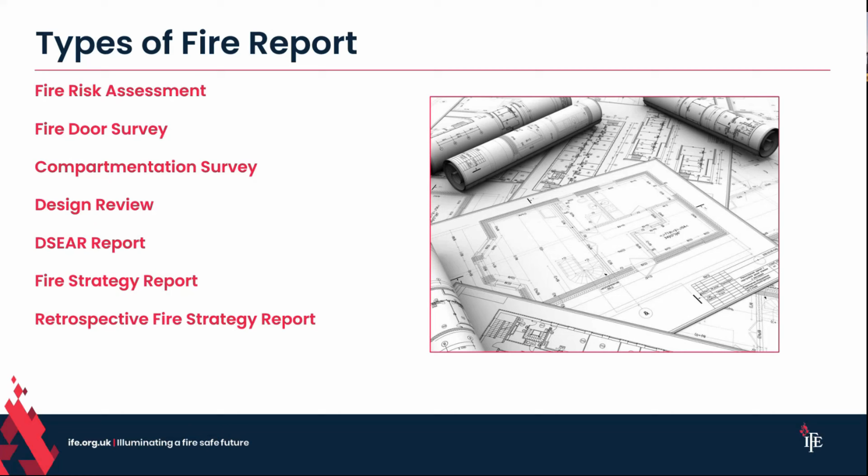So we're going to run through some types of fire report to kick off. Fire risk assessment, door surveys, compartmentation surveys, design reviews, DSEAR, and then fire strategies and retros as well to set us up for the main session. One thing I will highlight for those of us in this call here, we get a kind of ramp up in numbers for the main session, so there is some repetition.

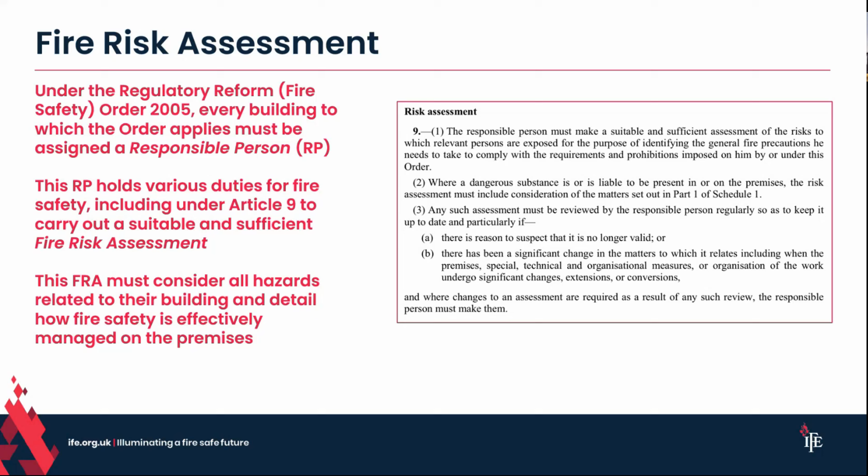I am the responsible person for our head office here. I'm at Innovation House here in Preston, which is our labs and offices and teaching classrooms and all that kind of stuff. So as the RP, I hold this duty and I have to do the risk assessment. Or if I wasn't competent, and I'm pleased to say that I am, I would seek an expert, a fire risk assessor, to come do that work for me. But the obligation still sits with me as a responsible person under the Fire Safety Order to do that assessment. The FRA must consider all the fire hazards related to the building and detail how fire safety is effectively managed on the premises.

Now, on the screen, anyone who comes to my sessions knows who I am and what I do. You know, I never normally read from the slide. I'm going to chat a bit and then I'll refer back.

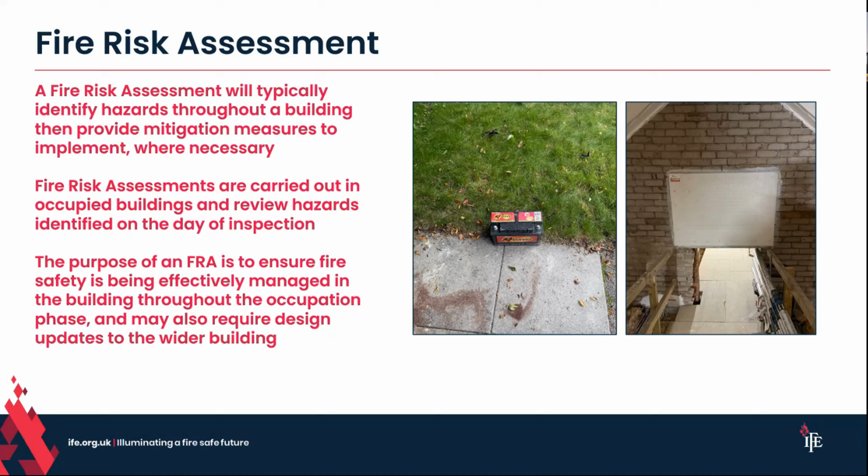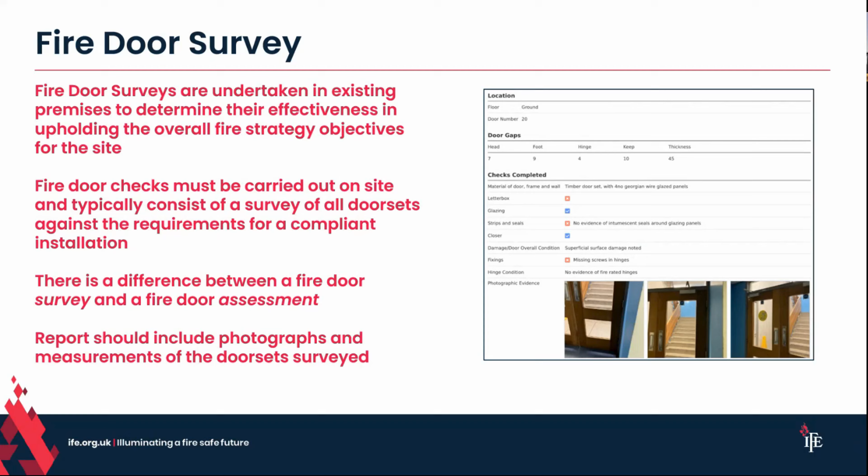So a fire door survey is an important report that we come across. It is not a fire strategy, but it is an important fire management document that we will come across working in the fire sector.

The next one, again, quick check from Joe that he's anonymized everything. Looks good, doesn't it? Marvelous.

So a compartmentation survey. I am really sorry to say, and I say this because it's the early careers, but it is a lesson for everyone. It isn't a thing. It doesn't exist. That name is incorrect. It's erroneous. And people say to me very often, again, we get it on the show, on the podcast. I get it when I'm teaching, when I'm speaking to people. Oh, they definitely do, because everyone calls it that. But you know, if everyone calls it something, it doesn't make it right.

Compartmentation in a building is a very specific type of passive fire protection. And it's very unlikely that we're engaged just to review that compartmentation. It's far more likely that we're engaged to look at compartmentation and also all the fire resisting construction that's in the building. So if we are just engaged to review compartmentation, all we're looking at is party walls, separation corridors to flats, separation between units, but we're not there to look at storerooms and cupboards and all those, because they're not compartmentation. That's a very strict definition.

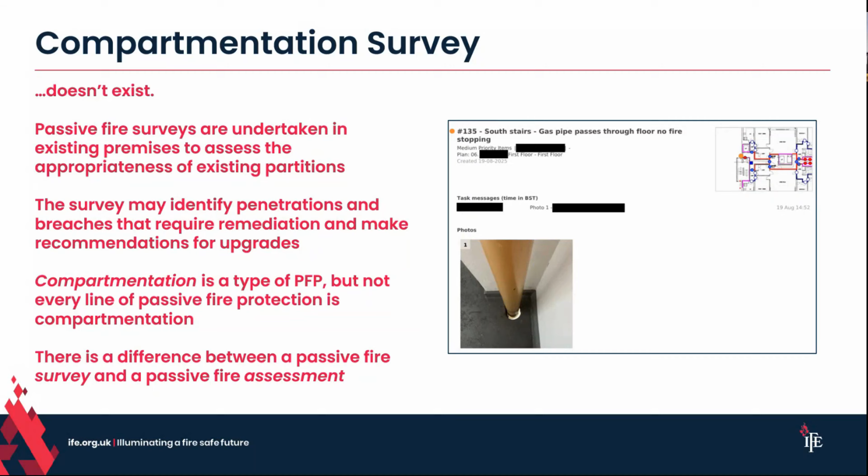I've seen all too often, and I'm ashamed to say, can confidently say I've been that surveyor in the past where I turn up and I go, what am I here to see? And they go, just look at the doors. And I go, what doors? What's critical? What's important? I need to rely on my strategy to understand what I'm looking for, which is what we've got a snapshot of there.

Cool, doing good for time. We've got just a couple more of these and we land on the fire strategies.

What a design review really is doing is helping inform the design team early in the process of critical things that we want to see changed or that we would recommend are changed, so that we can move that design along and we can develop a fire strategy comfortably further in the process.

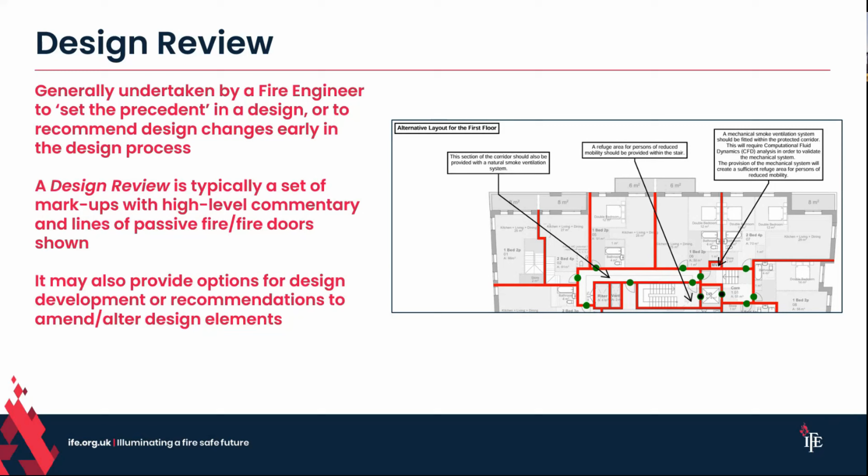If I'm working with architects, I do like to give options. I don't like to just say this is all you can do. If possible, I'll always give 2 or 3 and say these achieve the standards. And again, I'm kind of narrating my day. But I've been on the call to a contractor just this afternoon before I came on air here, saying there are 2 designs we would support. Let's present both to building control, see which one they decide on. So design reviews are really important, and we come across them a lot in fire safety. They are an intrinsic part to a fire strategy, but they are themselves not generally considered a strategy.

Another one very quickly before we come on to fire strategies and the main part of the session: DSEAR risk assessment.

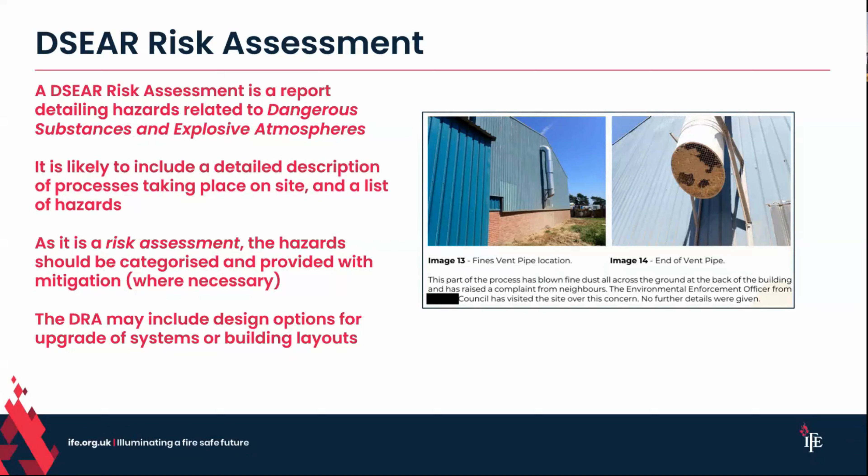And the point that I come to here is that very often off the back of any of these pieces of work, we find ourselves having to design a solution. And we land here at fire strategy reports. Now, these couple of slides we repeat in the main session. I wanted to get us to here before we start the main session in about four minutes' time. So I'll whiz through these, but we do refer back. So if we have anything that comes off of our building risk assessments or management systems, or we're designing a brand new building, we will require a fire strategy report of some kind. And there are a couple of different types of fire strategy reports we will come across.

The first one, and it's the first one that I think of, and I would wager, if I were a betting man, which turns out I am, so I will wager, that our friends in the fire service would likely consider this, and approval authorities, this is what we see as a fire strategy. If I said draw a fire strategy, you'd draw one of these, because it's a design strategy.

So it is during the course of the design of a building, working with our architect friends and working with the design team, we are developing solutions along the way to implement to that final building before it becomes constructed, becomes reality, and we design into the scheme. Generally, they're developed slowly throughout the design stage. We are making decisions along the way with the architect about how the building's going to look, what it's going to be made out of, and how it's going to operate. We follow what we call the RIBA stages, which we cover in the main session.

The intended audience for that changes throughout that design stage, and this is the main session content, but I wanted to at least tease it in this so we've got it in our minds. We're not always writing a fire strategy for the same person or organization or body. Early in the design, I'm writing that for the architect and the design team. This is what I think we should do collectively as a team. Like, thank you for inviting me to be part of your team. This is what I recommend we all do.

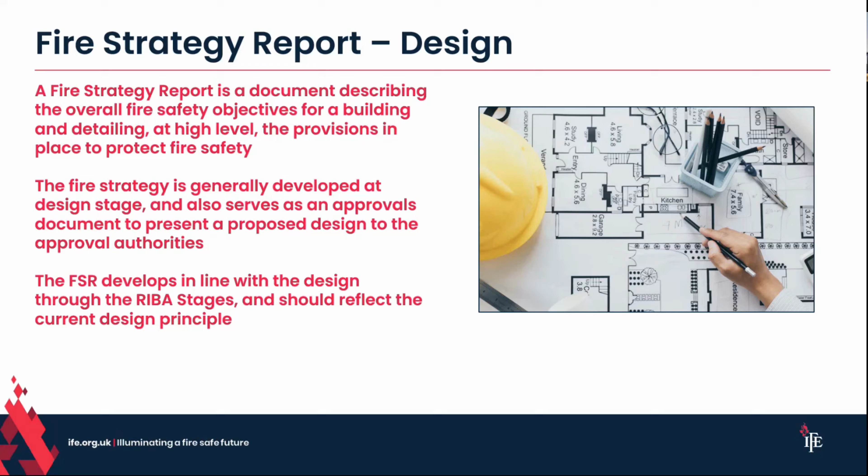I touched on this in the early careers, but not in great detail, and it is the first big takeaway really from the main session. When I train people, whether it's trainees who are working with us in the firm, whether it's students, whoever it is that's learning from me, and I always feel privileged to teach this, first big lesson in strategies: always consider who's going to read your report. So who are you writing it for?

It's so important to understand that, because the audience of your fire strategy, or the reader, or the end user, whatever we want to call it, changes depending on at what stage you're writing that strategy. If we are in the early stages of design, we are probably working with a design team, and we are saying to the design team, here's what I recommend we do as a team. And the intended audience for that is the design team and the architect and the client. And we're probably presenting options.

Early design stage, I'm going to use my building around me here because it's a good case study. That corridor, maybe, I don't know if my camera's on, and I don't know which camera I'm on. Bit of a shambles. There's a wall behind me if you can't see it, I promise you.

Does that need to be fire rated, yes or no? There is no right answer to that. In some strategies it does, in some strategies it doesn't. I've chosen not to fire rate that wall because above the ceiling in my office here is a shambles, and I don't want to have to fire stop the whole thing. So I've developed for my own building a different solution that doesn't rely on that wall being fire rated. If that were a design team and it wasn't my own building, I'd be saying to that design team, here's some options. They're my audience.

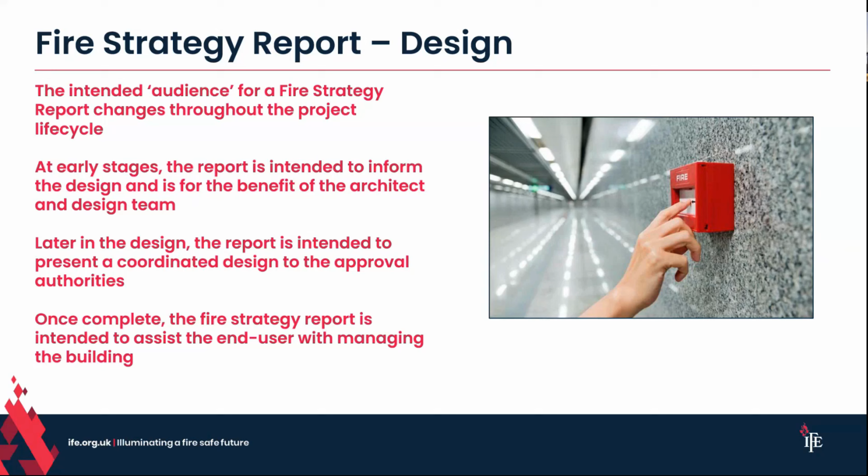It's one of the questions that I ask in kickstart meetings we have internally. Who's appointed us? Because if we've been appointed by an architect, we speak very differently in our reports to if we've been appointed by a fire safety manager, or by a responsible person who doesn't understand what their responsibilities are.

One of the very first things that we do in that engagement, when we're thinking about fire strategies, is we think about what we're trying to achieve. What are our objectives? There are many objectives that we might consider when writing strategies and working in fire safety generally. The first of those is life safety. We're seeking to protect the people that are in the buildings, and that's intrinsic, and that's one that never goes away. It underpins our regulations and all the work that we do. All of our professional ethics and standards are based on protecting life in buildings. If anyone contests that, leave the call immediately and I'll speak to you after. That's irrefutable. But we also have other things that we might put into our fire strategies.

For example, we might want to enhance certain things to protect the property that we're working on. I am fortunate enough to work on loads of heritage properties. In addition to getting everyone out of the building, protecting firefighters going in and protecting life, I'm also interested in the property protection, the asset protection. If I work on a museum or a gallery, one of my objectives is also to make sure that everything in that building survives a fire and we knock it down as early as possible. The couple of examples on the right-hand side are great examples. The top right there is a line-side fire on a railway.

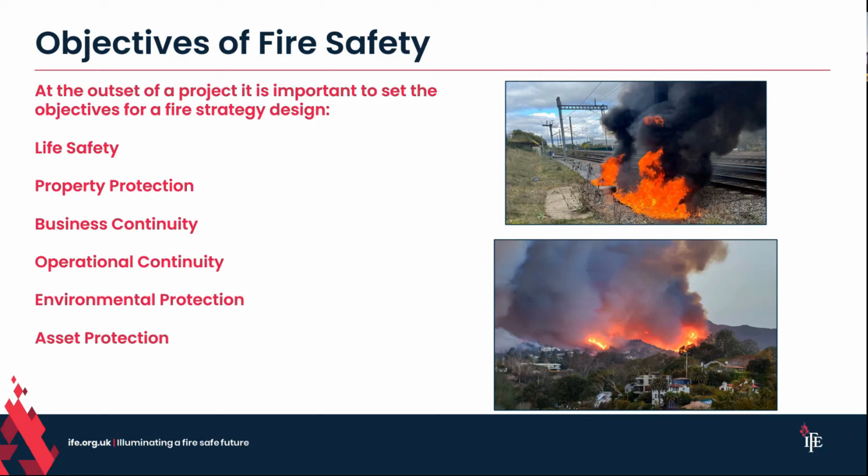Now, in addition to thinking about what we might like to do, there are things that we must do. We have requirements, and our fire strategy requirements, I'm going to talk about England because I'm based in England, but broadly this is across the UK, are in the form of regulations. For us here, we consider the building regulations to be our absolute minimum. Strategies are developed in line with the requirements of the building regulations.

The Building Regulations 2010, as amended, were made under the Building Act 1984, as amended by the Building Safety Act and others. But broadly, these set out requirements we must meet in our fire strategy. If our designs do not meet the requirements set in the legislation, we have committed a criminal offence. In truth, we cannot get away from those. It's our bare minimum.

And a second takeaway from this talk is that the building regulations are only based around the requirement for life safety. So if you meet the minimum standards of the building regs, you have met the objective of life safety, but there is nothing intrinsic in them for property protection, environmental protection, operational business continuity, protecting the assets. So very often we work to these and we go above. Certainly me as an engineer, if I'm working with clients and I know what they're interested in, I'm going to go above and beyond wherever I can.

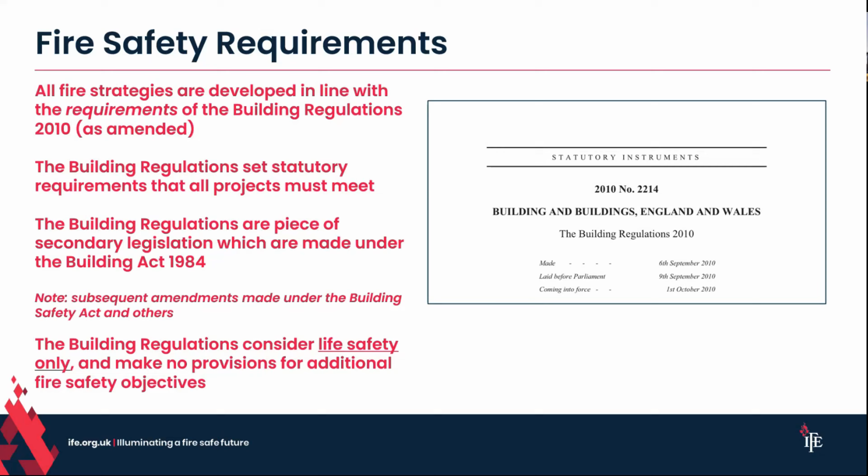So our first requirement is the building regulations. For anyone working in fire who hasn't read all the building regs, I encourage you to do so. Go read Part A. We're interested in Part B, but read Part M, Part P, Part S, Part T. There's just been a new T, but it is important sometimes. Part T is toilets, by the way.

So the building regulations are uniform across all disciplines. They work in the same way, which is what we call a functional system. They set functional requirements. They tell us what to achieve, but not how to do it. So when I say go and read all the building regulations, I'm not suggesting take a week off work and read them. I'm saying on the bus home, open them up on your phone and skim through them. It takes you 20 minutes.

Essentially what the building regs do is they set a bunch of functional requirements that we must do certain things to protect life safety in buildings. The example on screen there is intentionally not fire, it's structure. What it says in Part A is that the building should be constructed so that the combined dead, imposed and wind loads are sustained and transmitted to the ground safely, etc. It doesn't tell you how to do that. It just says that's what you need to do.

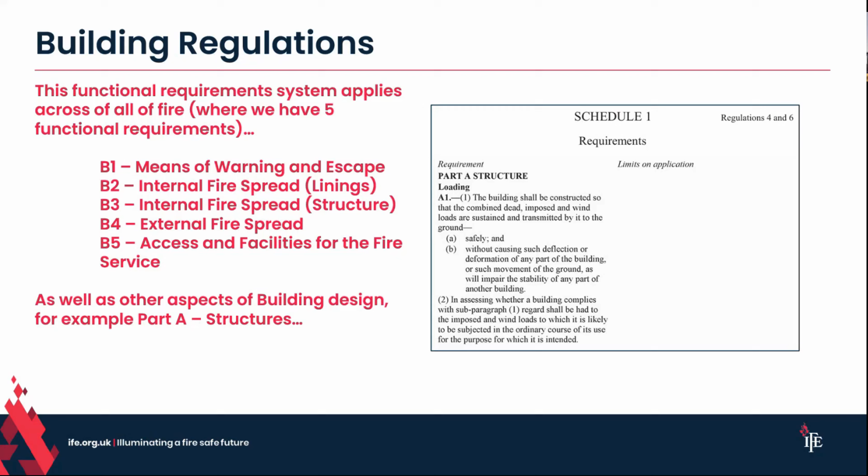And for us in fire, we've got Part B. That's broken down into 5 sections, Part B1 to B5, and it gives us all the different requirements that we need to do. What they look like is this. They are a set of functional requirements. External fire spread is Part B4. It tells us that the external wall shall adequately resist the spread of fire over the walls and from one building to another, and the roof should do the same.

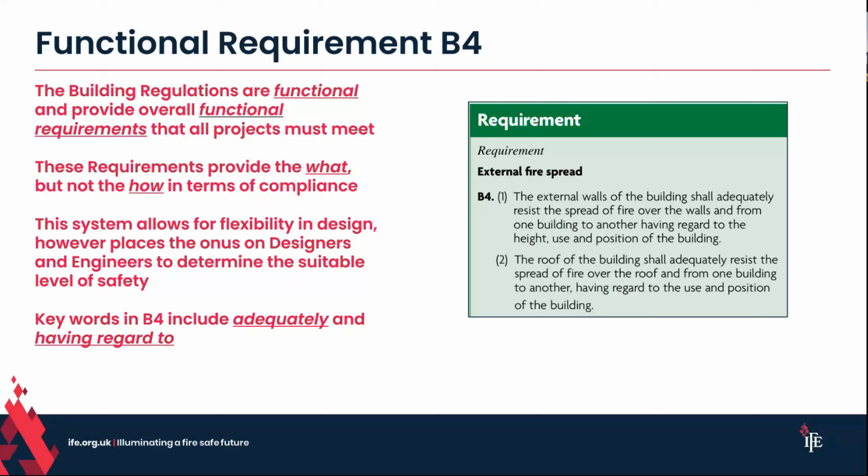It doesn't tell us how we should achieve that. It just tells us what we have to do. We get the what, but not the how. The system gives us flexibility as designers, but it also puts the onus on us. So in our fire strategy development, the first decision after we've set the objectives and who the audience is, we must also then decide what our definition is of adequate in terms of external fire spread and what we deem to be appropriate. We are essentially in our fire strategy setting out the definition of those terms and designing our building according to our own definition.

Now, I come on to how we write the strategy and then the methodology, and that's where we go in the next part of the talk. I've talked a little about the RIBA stages. RIBA are the Royal Institute of British Architects.

I'm a member of RIBA, an affiliate or associate, whatever it is. If anyone's in fire, and your company covers some professional membership, stick this one on, because I find it to be one of my most beneficial professional memberships, actually, because you get the RIBA journal and you get to understand architects and their processes, which is unreal. They also have an amazing CPD section on their website. So yeah, good little tip.

We look at the RIBA plan of work, and the RIBA stages an awful lot in fire. And that's because if we are designing a fire strategy, we are generally working in a design team and we're working through the stages alongside that team led by the architect. The stages start at strategic definition, stage 0. They go all the way up to stage 7, which is in use. Along the way, we get all of our design stages up to stage 4, into construction and manufacturing at stage 5. 6 is handover of the building and 7 is in use.

Fire strategy reports, as I mentioned, are not a piece of paper we write, give to building control and then invoice the client. It is a process that we follow. I find generally a RIBA stage 2 fire strategy report is one of our first engagements. For anyone in early careers, we talked about a design review. Often a design review is what we output at RIBA stage 2. What we're doing is giving concept design advice. So high level advice: this is what we're aiming to achieve and this is what we recommend putting into the building. And as we progress through the stages, we get more and more detailed.

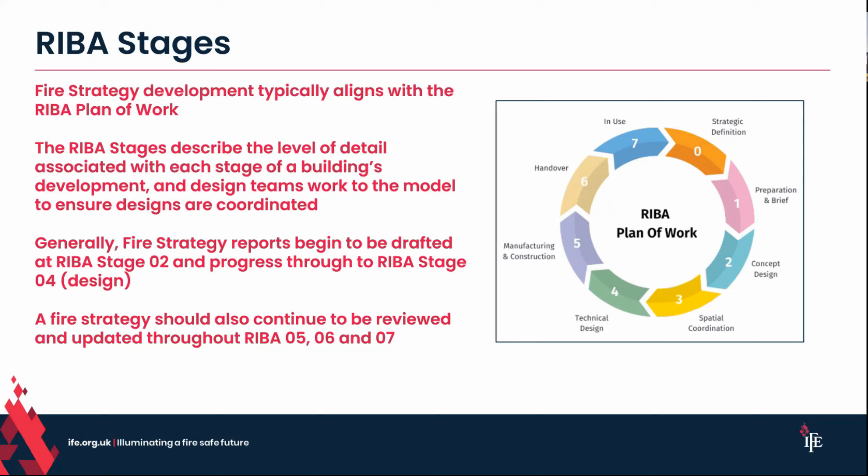Fire, I say all the time in these, is one of those unique disciplines, or sectors, I suppose, that are involved at every RIBA stage. We don't step down, we don't demount at any of those. We are involved throughout the whole building life cycle, and we're quite unique in that.

Now, to explain this, I thought I'd put an example in, and it is a made-up example, it's fictional. But to be fair, it could be every project because we do it so regularly. I thought what I would do is, if I were writing a fire strategy and I was fortunate enough to be engaged at the very early stage, at RIBA stage 2, that's the early design, and I'm going to be working on that scheme right the way up to handover at RIBA 6. That might be a 2-year job. What does my strategy do during that time? How does it evolve and change? Because it does. It's the same core strategy, but it will change.

So I've got a couple of examples here. There's a big white space because I fill in RIBA 3 and we go through this together. But I thought I'd pick a fire alarm, what I might say at each RIBA stage for a fire alarm system.

So RIBA stage 2 is quite high level, concept design stage, and I would be engaged and I would be designing a fire strategy, and I would be making a decision about who's in the building and how I'm going to protect them very early on. I'm not considering materials yet. We haven't got a plan, a detailed design plan. We might have some floor plans that are in abeyance, and we're kind of working through those still.

But I'm going to make key strategic decisions at this stage, and I might decide I'm going to put a fire alarm system in. So the text of my report would read something along the lines of, the building should be provided with an automatic fire detection alarm system to provide early warning to occupants of fire. And should is an important word there. It's very intentional that I've put that word there.

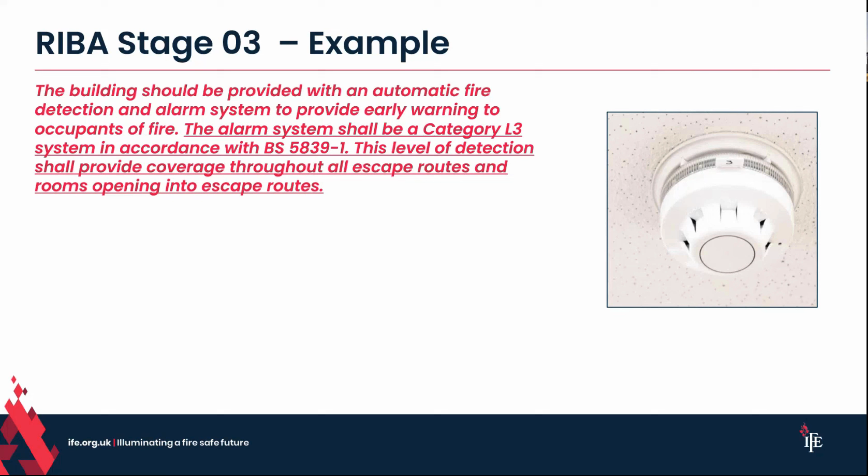So that the alarm system shall be a category L3 in accordance with BS 5839 Part 1. This level of detection shall provide coverage throughout all escape routes and rooms opening into escape routes. That is a design decision again. That comes under me. I have to make that decision and be able to back it up if I'm questioned. But I'm deciding now. We've got a little more information. I've probably got a relatively fixed layout at RIBA 3. So I know I've got escape routes, rooms opening into, so that's the category I'm going to choose.

Moving on to RIBA 4, which is my final design stage, I give a lot more detail. This is the last report, and again, I'm thinking about the audience. So this isn't just going to my design team and the architects sat around me, it's also going to the approval authorities. It's going to go to building control, building safety regulator maybe, the fire service, everyone on the client to sign off. So I need to give really clear, really definitive decisions at this point. I can't have options in a RIBA 4 report, because if I send that to building control or fire service, you are quite right to send it back and say, make a decision, chaps. Which one are you doing?

So my terminology changes at RIBA 4. Instead of saying the building should be provided with an automatic fire detection, I change it and say shall. It will. We've made a decision. This is what we're going to do. I still have the information about the category of system, but I have more detailed design as well, because off the back of this, we need to go find a contractor, we need to procure, we need to go out and build the thing. So this time at RIBA 4, I've added.

It's been identified that smoke detectors may cause unwanted alarm activation, and therefore heat detectors shall be provided in kitchens and plant rooms. Fairly straightforward design decision. I've plucked that out of 5839 part 1. I'd do that on every scheme, but it's final decisions that I've made, and I've documented in my strategy.

Detectors should be interfaced with the AOV. Detectors shall be, important word, interfaced with the AOV at the head of the stair. That's the vent at the head of the stair to open. And the smoke control system in the firefighting shaft. A good stage 4 design there. That's all the information that we need. I would read that as an approver, if I were an approver, and go, yeah, okay, that makes sense. We've got a decision. We know what we're going to do. Strategy's pretty solid. Now, that's the last design stage.

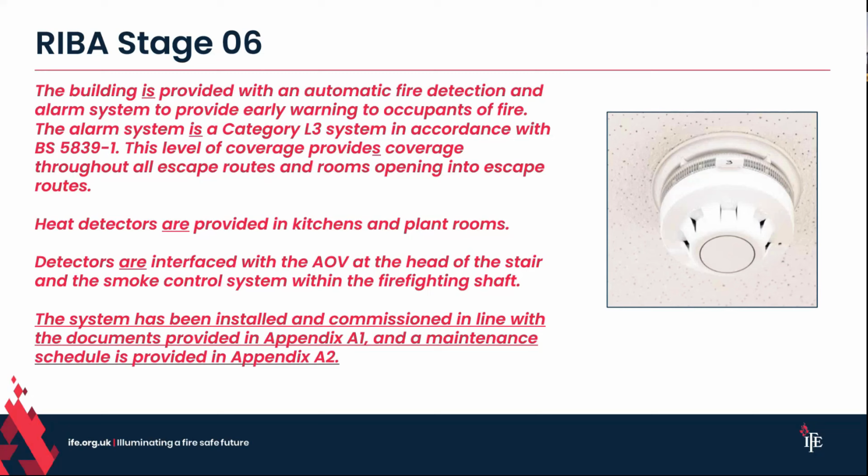Now obviously we're talking here about new builds, and we differentiated at the start that we've got different types, and in the early careers we started on this and we dropped it and said we'd come back. And I told a story in the previous one of my amazing colleague Tia, who's on the call, I think, and we chatted once about what we might expect in the fire service of a fire strategy, and we'd expect it to be a design.

And approvers sometimes are not aware of this, but actually a huge chunk of work that we do in the fire sector is about existing buildings. And there are lots of reasons that an existing building might not have a fire strategy. It might be that we, we being the royal we, the world has lost it. There wasn't a record of it. That happens more often than you'd expect.

It might be that our building is the White Tower in London, and it was built nearly 1,000 years ago, and William the Conqueror was too busy conquering, wasn't knocking up fire strategies, presenting them to building control. It might be that there just were no discernible standards at the time, or the work's been done without suitable approvals. All of these reasons mean that we might not have a fire strategy, and we do these retrospectively.

And this is sort of anecdotal, and if there's any fire engineers on and you message me after, I'd really like to hear whether you anecdotally feel the same. For me, it's about a 50-50 split in the sector at the minute. 50% of inquiries are new build, 50% are retrospective. I think with the Building Safety Act, there's a real focus on existing buildings and submitting safety cases and all that good stuff that we're doing. So about half the work that's banded around, certainly in my portfolio, is actually existing buildings.

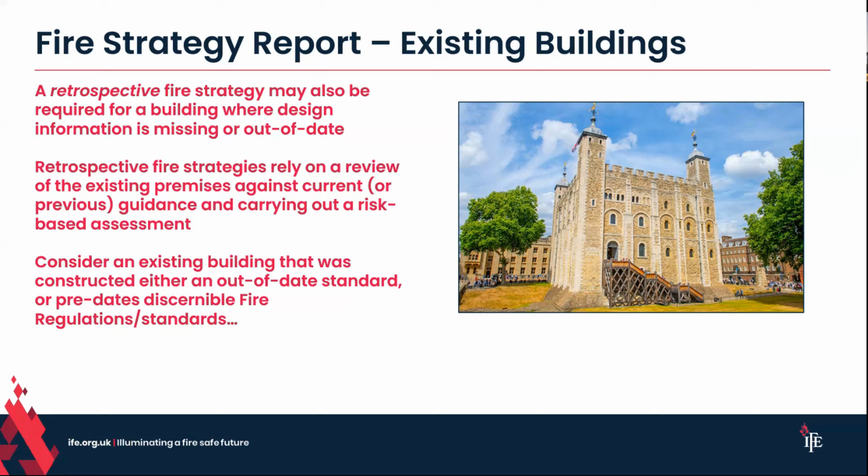And this, when we got this question from a member saying, could you please cover this? This was the crux of the question. What do we do with existing buildings? And I'm really happy to answer it, because this is a big chunk of my own work.

And we find ourselves very often writing what we call retrospective strategies, or at least passive strategies. Now, where a building is existing, but we have no design information, it's common to produce what is asked for as a retrospective fire strategy or a retrospective fire strategy review. There are broadly two types of retro report that we might carry out. There is what we call a compliance review, which is a review of the building to the standards at the time of construction. And there is a risk-based review, which is what we review to current standards. And they are very, very different reports.

And if you are an engineer, or you become one, or you seek to become one, and you start getting asked for these, the first question to nail with the client, got to be in your fee proposal, probably the first call you have with them, is which one do you want? Is it a compliance review you need, or is it a risk-based strategy for your current condition?

I note on there some of the reasons we might need to do a retro. It might be the information's wrong, the building's changed, and we're not confident in what the design information says, or it's heritage, they just weren't writing strategies at the time, or we've lost it. It happens all the time. So those two types of retro report are super important, and I want them to be some of the takeaways for the member who wrote to us and said, could you please cover this in one of your webinars?

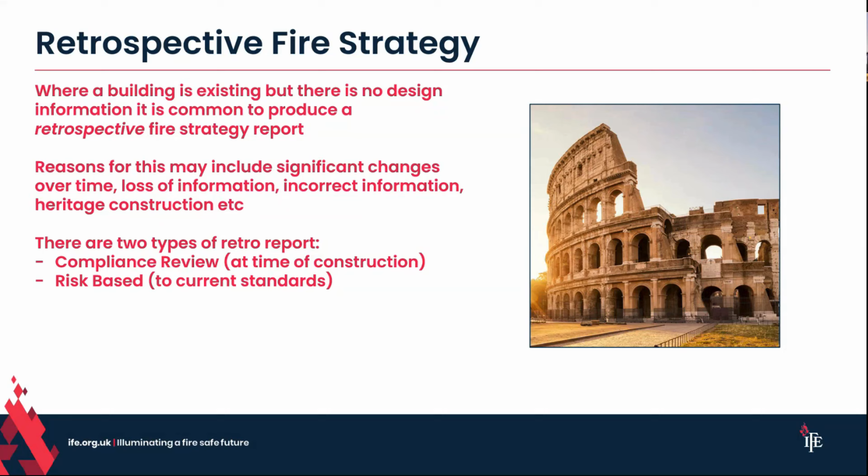Now, I've got a couple of examples. Some of my team will recognize their own report. I do hope I've anonymized it, especially because we're recording. I definitely hope I've anonymized it.

So the first one of these is a risk-based fire strategy. It's a retrospective strategy based on current guidance. And this is, to be honest, how retrospective strategies should be done. If I'm engaged to write a retrospective strategy for an existing building, I am going to review that to current standards that I would design to today. So let's start with the one on the right-hand side, the image. I'll talk through that, and then we'll come into some of the theory, and I've got another example on the next slide.

I will suggest it is impossible to write a retrospective strategy without going to site. Then it is not a suggestion, it's a fact. It really is not possible, because your scope, what we're aiming to achieve, is to review what's on site. So you can't do it by driving past or do it on Google Maps. And what my amazing team have done here is they've been on site.

So it was observed during [our company's name] site familiarization visit back in January that the fire alarm detection system is present in the common stair, but does not extend into the common corridor and common lobby, as shown below in figure 10. This is a real project; I've just plucked it off the system. I don't know if it's a good or bad example, but it is an example.

So the area shaded in blue shows areas of [project name], which I've anonymized, which is provided with detection coverage, and the area shaded in red shows areas not. It is understood that the alarm coverage at [project name] was implemented based on advice from a given fire and rescue service. So what we've said in this case is that we've been to site and observed we've got detectors in the stair but not in the corridors, and we have documented in our retrospective strategy what is on site today as we stand there.

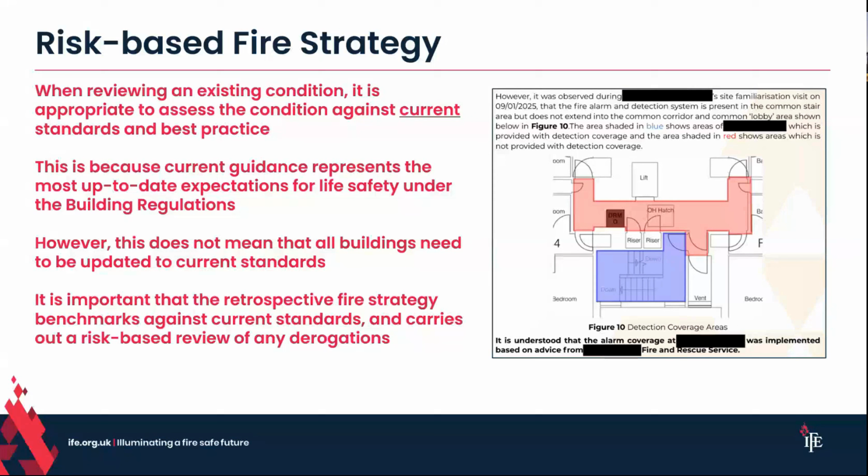Every time we get a new ADB, we're not going to every building in Britain and redoing it; we'd be doing it every 5 minutes. What we're doing though is using the current best practice and best knowledge to benchmark against and assess our building to best current knowledge and standards. So it's important, final bullet point, that a retrospective strategy benchmarks against current standards and carries out a risk-based review of any derogations.

Now, what that looks like in a strategy is on the next slide from the same report; we've got some of those derogations. And this is, again, the way I present it and the way that our team presents it. It's not right or wrong. Well, it is hopefully not wrong, but it's not the only way. But this is, we believe, a useful way. We include in every one of our retrospective reports a derogation schedule, and we highlight everything that doesn't meet current standards if that building were to be built today.

You'll note that in this example, we disagreed with the fire service. Again, I've anonymized it. I hope nobody recognizes it. If you do, that's not my intention.

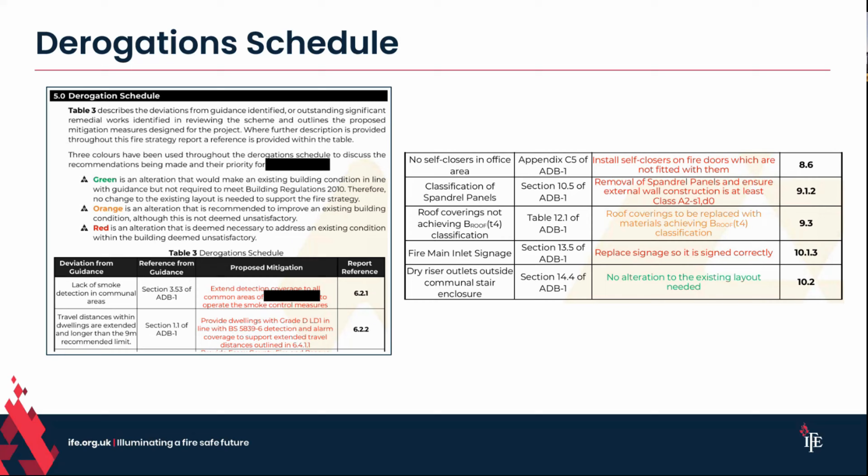Right, excellent, cool, we'll soldier on. The other type we talked about was a compliance review. I said there are two types of retro. The first one is what we just discussed is risk-based, and the second type is a compliance review. Now, this again, I'd like to be a takeaway for folks who are learning or are practicing maybe, but find it difficult to differentiate. It's an important point. A compliance review is reviewing a building to the standards at the time of construction.

Now, that can be valuable in some cases, and we do a good chunk of that. A couple of my guys who are on the call, Alicia Limara, we've just done a big piece of work doing this, where we did a compliance review at time of construction. The reason for that was because there was some litigation against a contractor. Had they made mistakes? Should it have been built in that way in the year in which it was constructed?

Fair piece of work, it needed doing, but we caveated really heavily by saying, we're not saying you just need to bring it back to the standards of 1970, whatever it was. In addition, we need to do a retro and decide what you're going to do to make the building safe today. But a compliance review to standards at the time is not something that we consider for life safety in our fire strategy.

So if our objective is just to work out liability, to apportion blame, to work out what mistakes were made at time of construction, and there is a world where that exists, there is an expert witness industry within our sector, and I live in that industry, don't get me wrong, it's an important part of what some of us do. But it's not the correct approach if we're looking at building safety. It's not appropriate, in my view, to say, well, the building was built to this standard. It was okay at the time. Standards have changed, but we'll build it back to what we said in the 1970s.

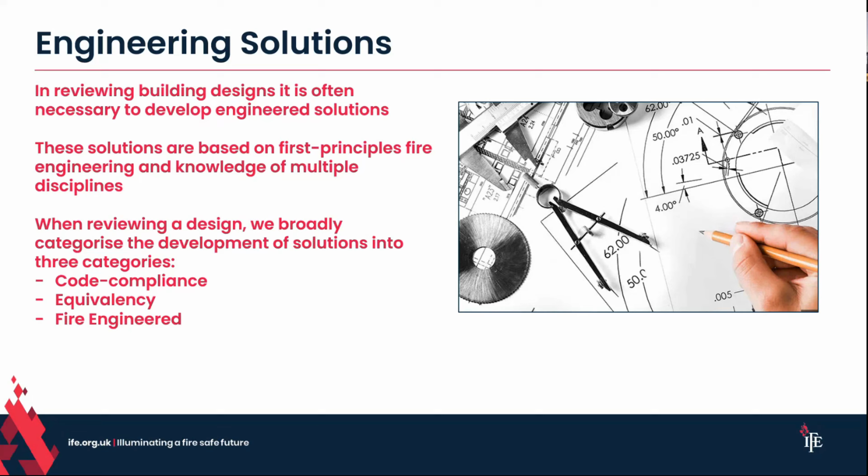And there are broadly 3 methods that I use for this to feed into my report for each of those subsections. The first thing I might choose to do is to comply with an established guidance, so a code compliant route. For example, Approved Document B gives me a schematic there for how to design a single stair block of flats based on the principles of compartmentation between flats, fire doors, limiting travel distance, and ventilating the lobby. If my building complies with that, fantastic. That's my design approach. I'm going to follow that and write my strategy based off of the guidance in ADB.

If my building maybe doesn't, and I want to change it up, and my travel distance is 8.5 meters, I might say in my design, can we reduce the travel distance, move the stair? If you've got cross corridor doors, can we remove them maybe, and can we have it so we have a lobby approach and we ventilate the whole lobby? That might be a good piece of design. I will either amend the design during my design review to meet guidance, or if I already meet the guidance, I know I've got an established principle. That's my first option, really.

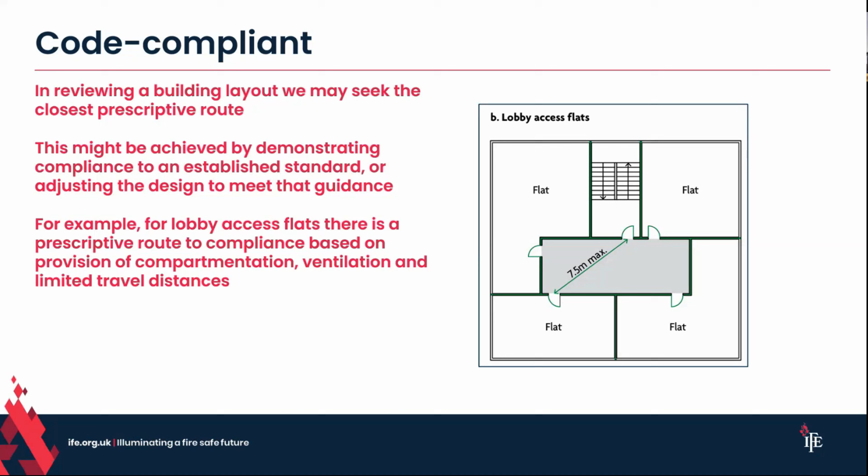But because guidance isn't mandatory, there are other things that I can do. And if I'm an engineer, I may seek to deviate away from that, not because I want to bend the rules, but because the rules are there for very simple premises. And most buildings I work on as an engineer, the only reason I'm engaged is because I'm working on a complex building. So I look at my engineered solutions. The first method I'd use for this is what we call equivalency. And equivalency in engineering is if I take an established principle and I can quantify the safety, and if I can demonstrate that my design doesn't meet that guidance, but it is equivalent to or better than, I've demonstrated equivalency. And the great example I use for this all the time is travel distance.

So let me pick an example. Purpose group 3, an office. You need to have 18-meter travel distance limitation in one direction and 45 to reach a place of safety. That's not a regulation. That's not illegal to deviate from that. I'm sat in a building that doesn't meet that standard right now. It's my own head office. But what I would do is I'd say, okay, well, because I don't meet that standard, I need to demonstrate equivalency or do an engineered solution. So what shall I do instead?

And the way that I approach that, and travel distance is one of these that I do very simply as a simple solution, not involving modeling and all that kind of crazy expensive stuff, is I'd say, okay, so what Approved Document B is telling me there is that my office needs to have 45-meter travel distance maximum to get to a place of safety. And I look through the document and I think, what else does it say for an office that I need to have? And if I follow that chain through, you say, okay, the office then, you limit travel distance to 45 meters, but I only need 2 stairs and I don't need a fire alarm because all I need is a manual system.

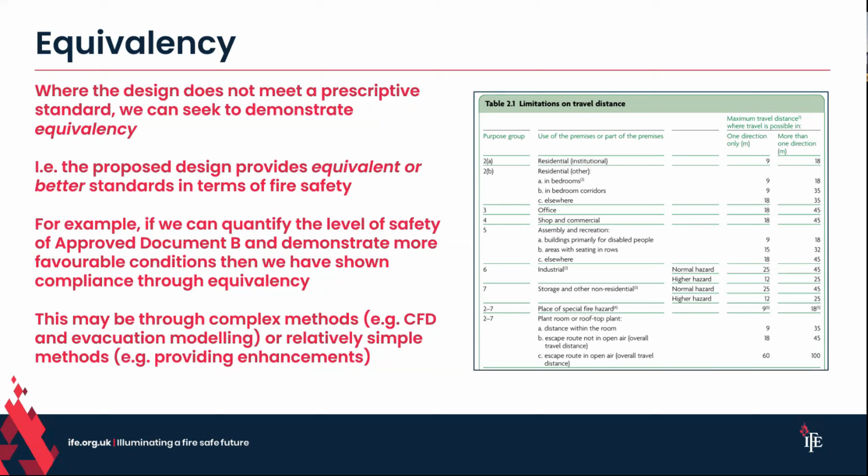So actually the building's safer for longer, and I'm going to seek to demonstrate that that's safer, equivalent or safer. Or because you have to travel a little bit further, what I'm going to do is I'm going to make sure people are alerted quicker, and I'm going to put an automatic system in, and that allows me an offset of travel distance. If we would be comfortable with the Approved Document B compliant route, if I can demonstrate that I'm safer than that route, I've demonstrated equivalency, and very often I'm much safer than what the guidance would otherwise let you design to.

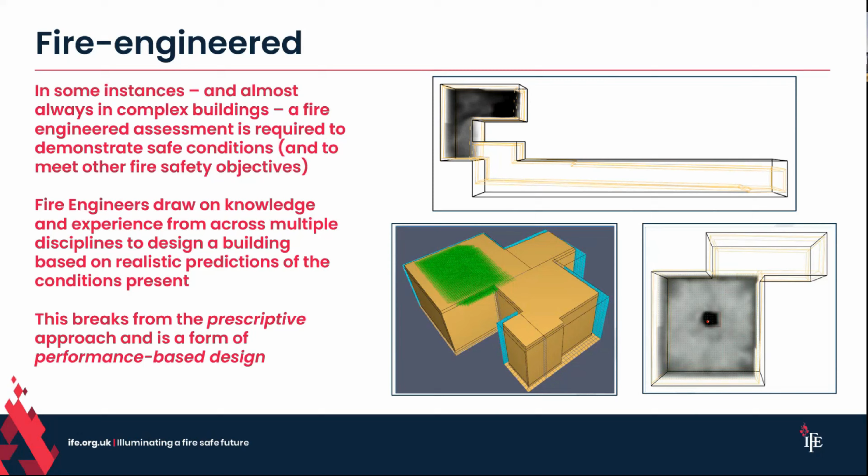An important note, and I come towards the sort of end of the talk, and then I hope everyone will stick around, because when I say that, everyone dials off. But there's a couple of bits at the end that summarise and are helpful. So please do stick with me.

A really important takeaway that I like to give when I teach this and when I talk about this subject, is that when developing fire engineered solutions, there is not a little tick sheet. If there was, it would be worth $1 billion, not billion, million, 100 grand. I don't know. It'd be valuable. You can't go tick, tick, tick, there's your solution. It is bespoke. It has to be based on the building. It is not as simple as, despite many clients phoning me up and saying, oh, we're going to do this instead. Is that okay? Can you write me a report to justify the solution we already have? It doesn't work like that. It all has to be based on solving the correct problem.

I say all the time, solutions have to be pragmatic and proportionate. If we're in existing buildings, it's got to be proportionate to the risk that we see. If it's in new builds, so it's a design strategy, it's not simply what the guidance says. It has to be relevant to the building that we're designing. The important note is that prescriptive guidance is not always the safest approach. If anyone doesn't understand what I'm saying there, or questions it, or says, but Approved Document B must be the holy grail, the image on the right-hand side is some of my own modelling, a CFD report that I wrote.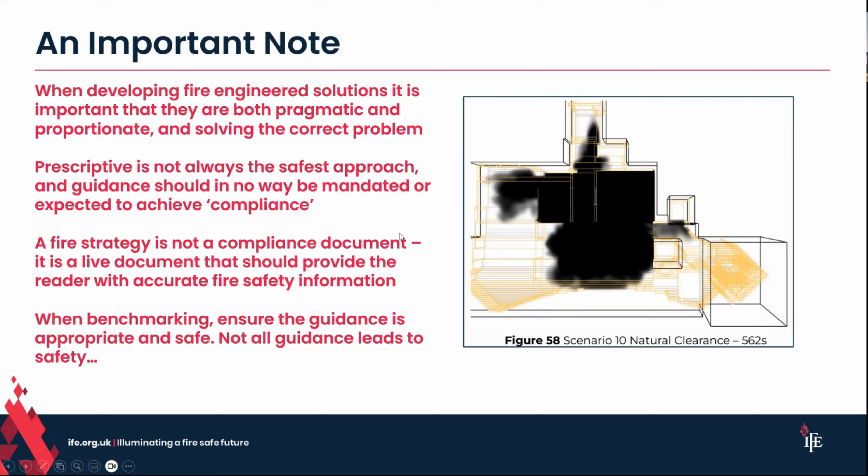So I will summarize very quickly, and then I've just got a very quick note about the branch, and then we're good for time. The summary is that fire strategy is a form of fire report. There are many different types of fire report, but strategy is very specific that provides strategic, high-level fire safety information about a building. It may be a design document, or it may be produced retrospectively. When we undertake it at design stage, what we're looking to do is develop along with the design team, and it's ultimately presented to the approval authorities. And it should continue to be updated during construction and be handed over to the end user so they understand their site.

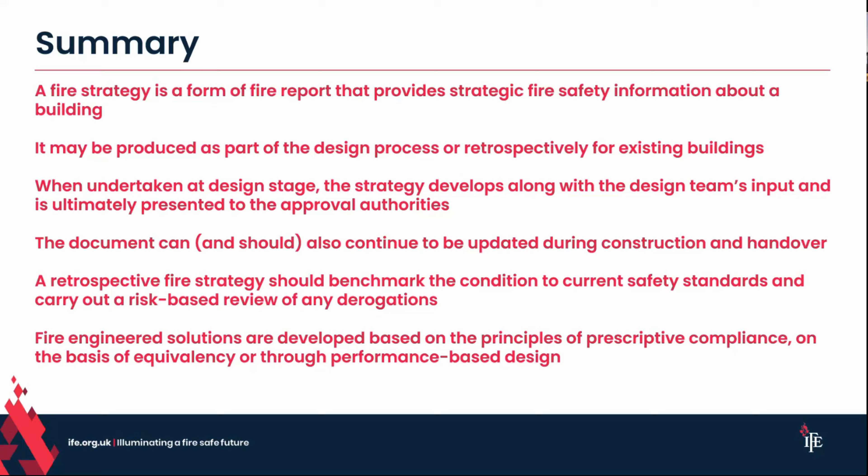If we are doing a retrospective review, we will benchmark against current guidance. If we're looking at life safety, there may be other reasons that we look at existing or previous standards. Largely, if we're looking at litigation or we're doing legal work, and that's valuable there, but generally we're looking at current standards. Fire engineered solutions we use, we either meet with prescriptive guidance, we demonstrate equivalency, or we go full performance-based design on top of that. Cool. I fear I've gone on slightly further.